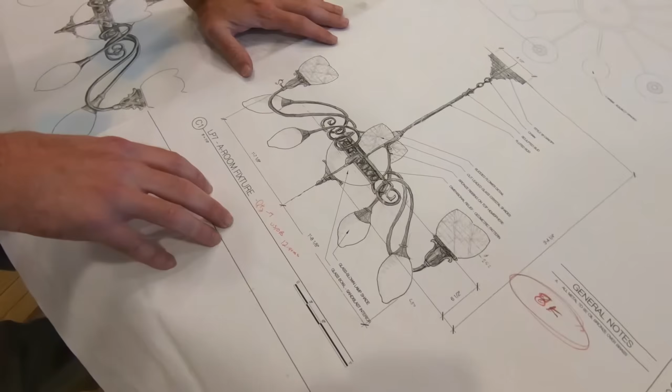What you see here is an architect's rendition of a fixture they'd like Crenshaw to manufacture. This fixture has basic dimensions laid out. It has the overall structure with a few detailed notes that indicate the level of quality this fixture should represent. This document is used by Crenshaw to create a quote.

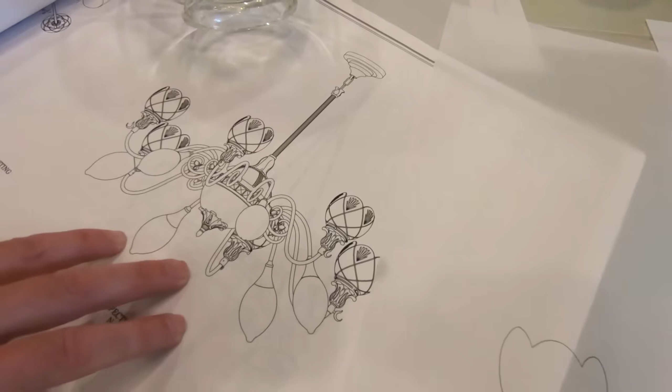Our designers review this architect's drawing for all key features and details. They estimate what these costs might be and provide a quote to the client. Upon further approval, a finer concept drawing may be created. In this case, it is a hand-rendered concept. From this concept, and with the architect's revisions, we create a three-dimensional CAD model. Once approved, we move into production, and the high level of quality is apparent.

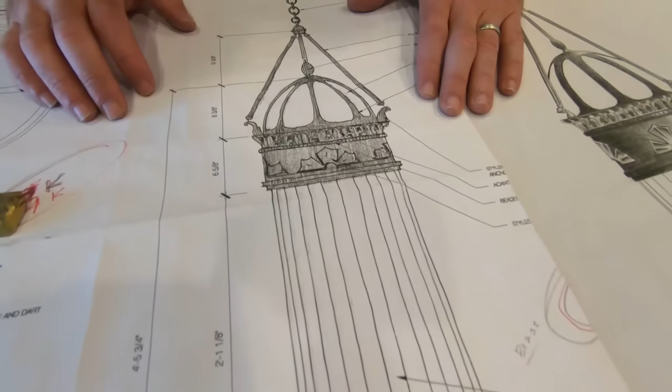This is another example of a fixture that Crenshaw Lighting has produced. The architect came to us with their vision of what they wished to see hanging in their space. There are sketch details and several dimensions used for our reference. Crenshaw's designers used this to create a quote based upon the articulate castings, machine components, the custom glass, suspension, and all the various elements of construction.

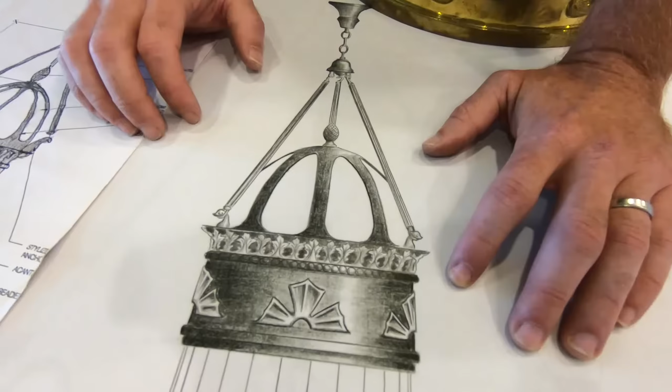The details for this fixture became more refined by Crenshaw designers. Another hand rendering was created to show to the client what our intent was. This drawing was further refined with the architect to be in line with their vision. To make this a reality, we 3D modeled this in our SolidWorks program to get the final details before full production. This includes the cast components, the glass components, the sheet metal, and internal lighting construction, all of which go to our vendors and fabricators.

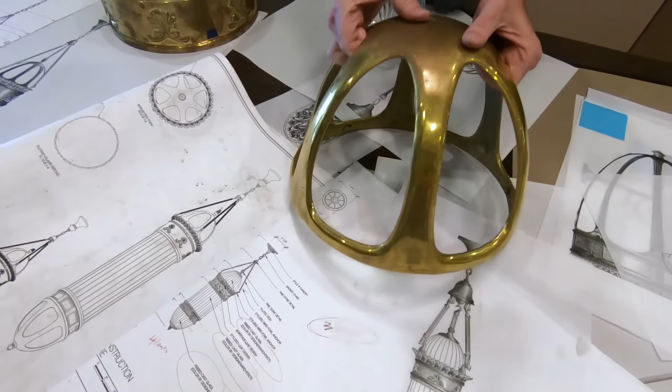This is an example of a cast component that was created from these drawings. It is in a pre-finished state before final production. This piece rests on two other castings, one of which is not present for this video. But you can see the high detail we have in these brass components.

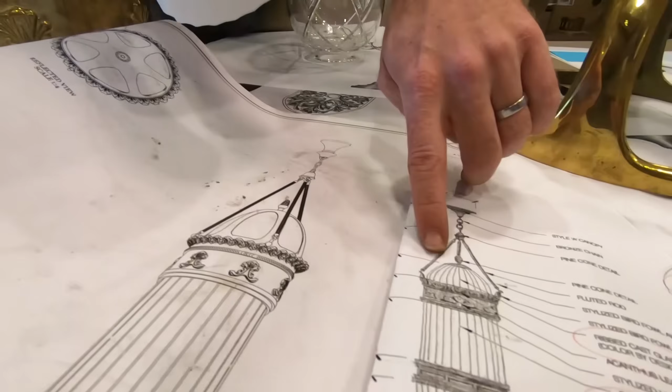In addition to the castings, we have an example of our custom blown glass. This piece is from a similar pendant, only smaller. It is also part of this beautiful family of light fixtures. Once again, we have gone from the architect's concept to a refined hand drawing by Crenshaw designers, and lastly, we bring it to life.

This fixture was just from moments ago. We have high-level lost wax cast brass components with fine details. It has a satin pattern with an oil-rubbed bronze patina. This fluted glass is hand-blown. There is a multi-layer metal trim and another hand-blown glass detail at the bottom. The bottom is retained with a spun metal base and a machined finial.